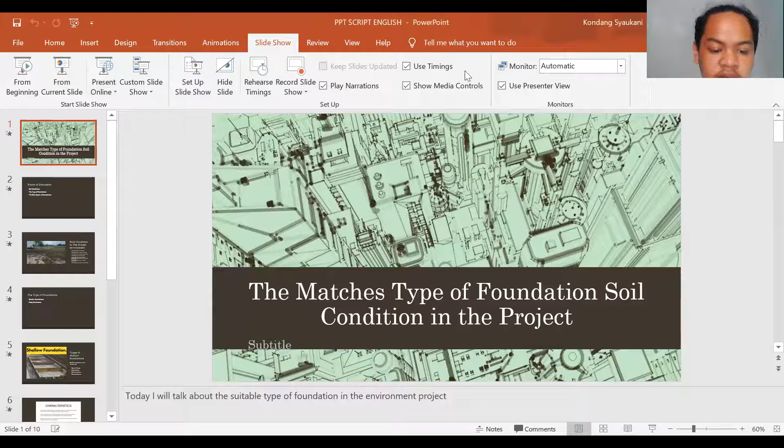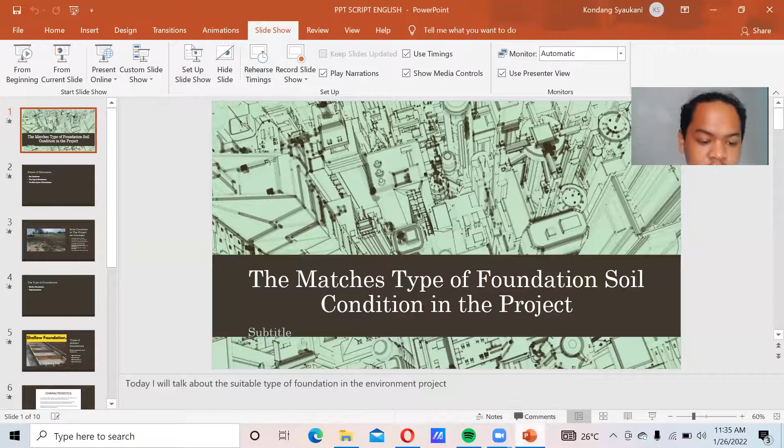Let's begin. What is soil survey? Soil survey is the process of classification of soil type and other soil properties in a given area, geocoding such information. It applies the principles of soil sciences and draws heavily from geomorphology theories of soil formation, physical geography, and analysis of vegetation and land use patterns.

That's all I have to say about soil survey. Let's move on to the soil survey report.

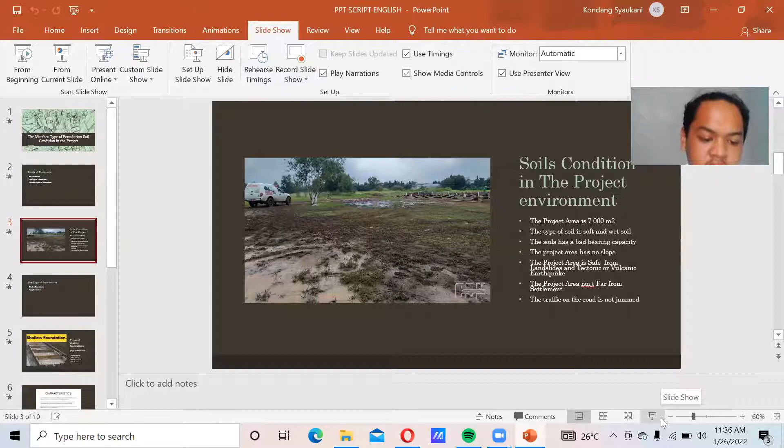As you can see on the screen, the project area is 7,000 square meters. This project area meets the requirement for the minimum area of a hospital building. The type of soil on the project and environment is wet and soft soil with a poor bearing capacity. Because the soil is soft and wet, there is a need for reinforcement of the foundation.

The project area also isn't far from the main road, so access to the hospital is easy, and the traffic around the project isn't jammed, which makes it easier to get the ambulance in and out.

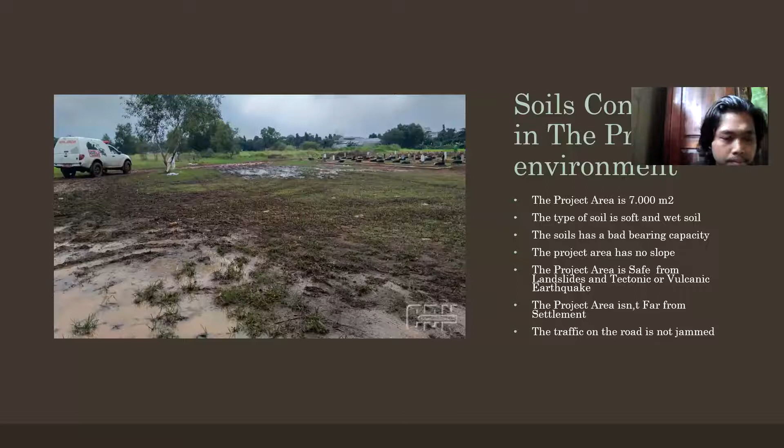But we have problems about the soil type. Can the hospital stand on the soft ground? Yes, of course. We have a problem with the soil type, but with the right foundation, the hospital can still be built and stand firm. Are there any other questions?

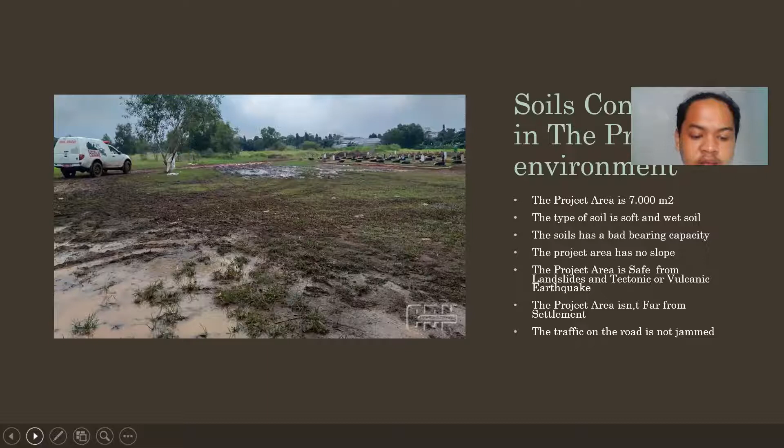Well, I have told you about the soil survey report. Let's move on to the foundation structure. The foundation structure will be explained by my assistant, Mr. Irfan. Over to you.

Good morning, everyone. My name is Irfan Aftalarik. I'm the assistant of Mr. Farhan. I will tell you about the foundation structure.

So, there are two types of foundation structure. The first is shallow foundation. Shallow foundation can be divided into spread footings, strip footings, slab foundation, and grid foundation.

Shallow foundation has characteristics such as the objective to distribute the structural concentrated load over a wide horizontal area at a little depth rather than a range of depth. This type of foundation is often selected when the soil has good bearing capacity, and the structural load will not cause excessive settlement of underlying soil layers.

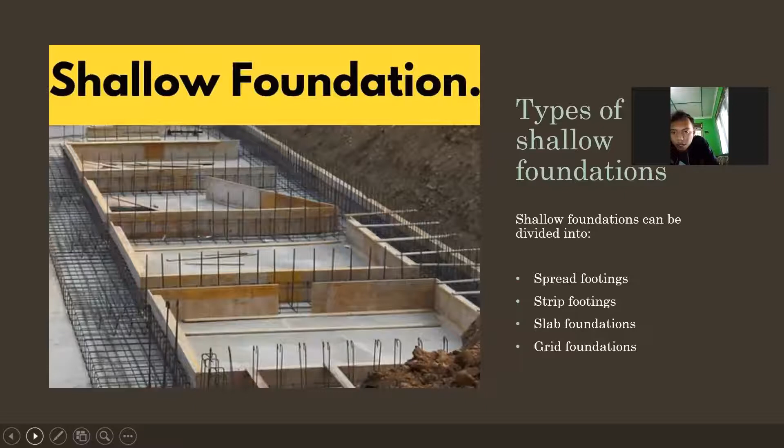Shallow foundations are more simple and cost-effective to construct than deep foundations because little soil is removed or disturbed. This foundation is usually utilized in residential and light commercial buildings. Shallow foundations are generally constructed using in-situ concrete, but some substructure elements can alternatively be constructed in precast concrete in part or whole to improve speed of construction on site.

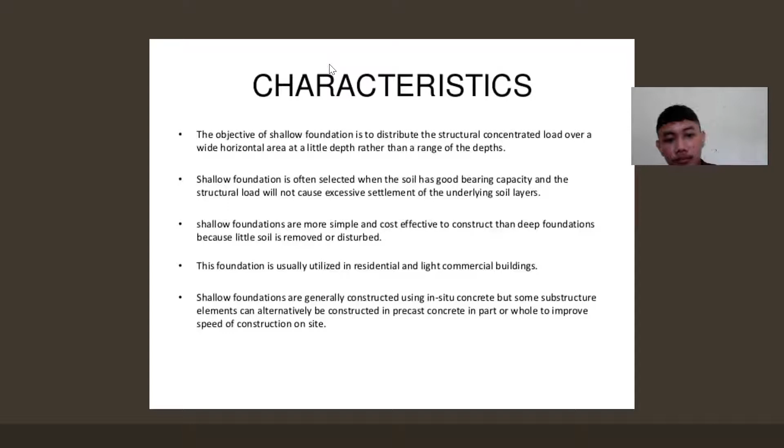Okay, any questions or input? I think that's a good type of foundation, but I don't think shallow foundation is suitable for our project because our project has a bad bearing capacity. Of course, boss, but I will explain the conclusion after I finish explaining the deep foundation. Okay, no problem.

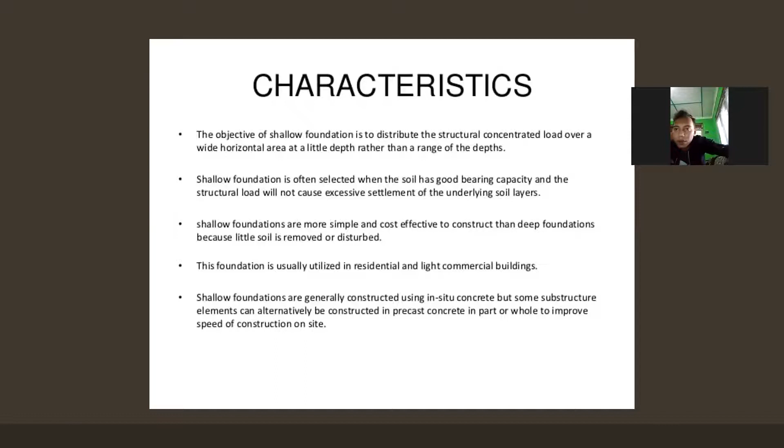All right, if there are no more questions or input, let's move to deep foundation, or pile foundation. The types of deep foundation in general use are as follows: basement, buoyancy raft, caissons, cylinders, shaft foundation, and pile foundation.

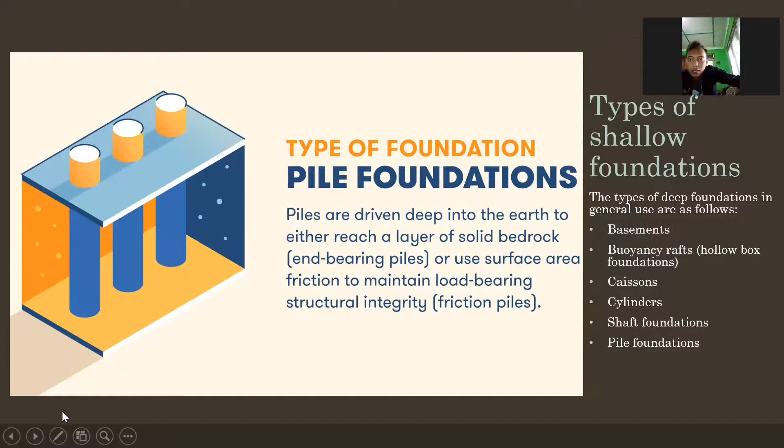Deep foundation has characteristics such as the objective to distribute structural lateral loads, and this type of foundation has good uplift force. This type of foundation is often selected for bad bearing capacity and skyscraper buildings, where the structural load would otherwise cause excessive settlement of underlying soil layers.

The construction of this foundation requires a complicated process, and the cost to construct the deep foundation is very expensive. All right, any questions?

Yes, Mr. Ginanjar, what is your question? As already said above, the deep foundation requires a complicated process of construction. So how do we set it up?

Next question by Mr. Ginanjar. The deep foundation requires a complicated process of construction, but we can still set it up with the help of expert, skillful staff and heavy equipment like a drop hammer or hydraulic hammer. This equipment will make the construction process easier.

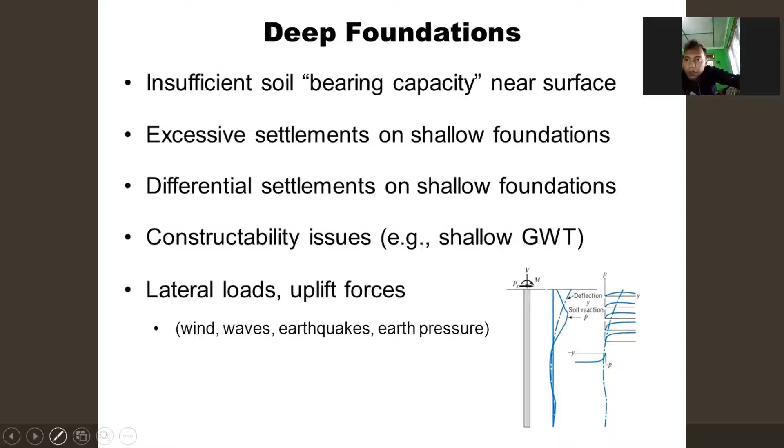Oh, I see. Thank you, Mr. Farhan. You're welcome. In conclusion, we will use Pile Foundation on this project because Pile Foundation is suitable to our project environment. Also, Pile Foundation can work with land and maintain very heavy loads such as in the construction of high-rise buildings.

The reason for using Pile Foundation is that it works brilliantly for weaker soil areas. It is suitable for deep installation and is long-lasting. Pile Foundation can be pre-ordered as well as custom-made according to need. It is desirable even for wetland construction and for all sizes of land construction. It facilitates reduced construction time. So the best option of foundation suitable for our project is Pile Foundation.

Yes, Mr. Iswan. I'm sorry, but the Pile Foundation has an expensive cost to the constructor. Does it matter to our project budget?

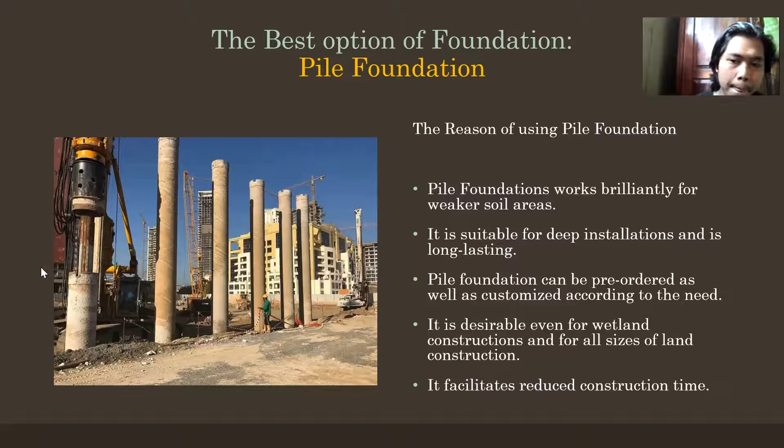Okay, Mr. Farhan, Mr. Kodang, thank you. I think there are no more questions. So we have looked at the foundation plan. Next, we will talk about the building structure. The building structure will be explained by Mr. Rafli.

All right, thank you Mr. Irfan. So I will explain about the building structure construction. Good morning everyone, my name is Muhammad Maulana Rafli. I am the assistant of Mr. Farhan. I am responsible for the structure of the building to start with. I will tell you about the details of the building structure. Please feel free to interrupt me if you have any questions.

Let's begin with the basic components of the building structure. They are beams, columns, roof, walls, serving the purpose of supporting structure, based on the soil survey report. For the beam and column, we will use reinforced concrete construction for the project.

Yes, Mr. Kodang, what is your question? Why don't we use steel as our building structure construction? Good question. We choose reinforced concrete for our project because it is easy to shape and flexible, and it's still usually used along with brick construction. Reinforced concrete construction is more well known as a building structure than steel construction.

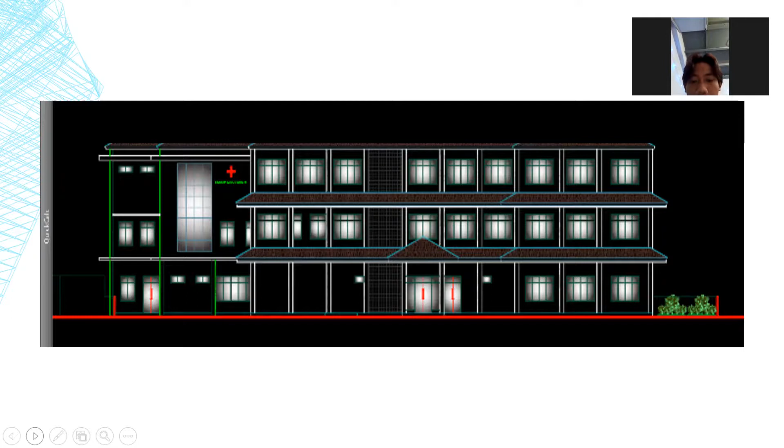The second floor will be used as ICU rooms, laboratory rooms, radiology rooms, and surgery rooms. The top floor will be used as service rooms like laundry, genset, and incinerator room. For the details of the design, it can be explained by my assistant, Mr. Iswan. Over to you.

Thank you, boss. Good morning, everyone. My name is Muhammad Iswan. I'm the assistant of Mr. Ginanjar. I'm going to tell you all about the details of the building design.

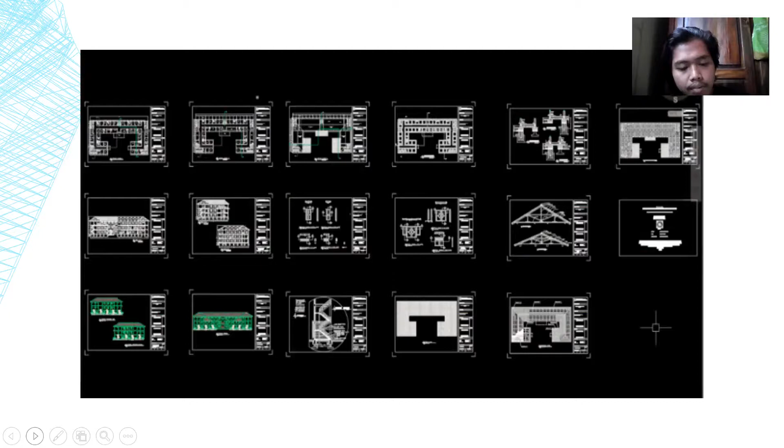Please interrupt me if you have a question. So this is the details of the design. The building design is environmentally friendly and sustainable. The building design doesn't require a lot of energy.

The building also offers a rainwater harvesting system and solar panels, helping to save our operational system, so we can use the area as much as possible. No area is wasted in the middle area. There is also a garden, which makes a fresh atmosphere, so visitors can stay comfortably without being bothered.

This is the 3D design of the hospital building. Do you have any questions or input?

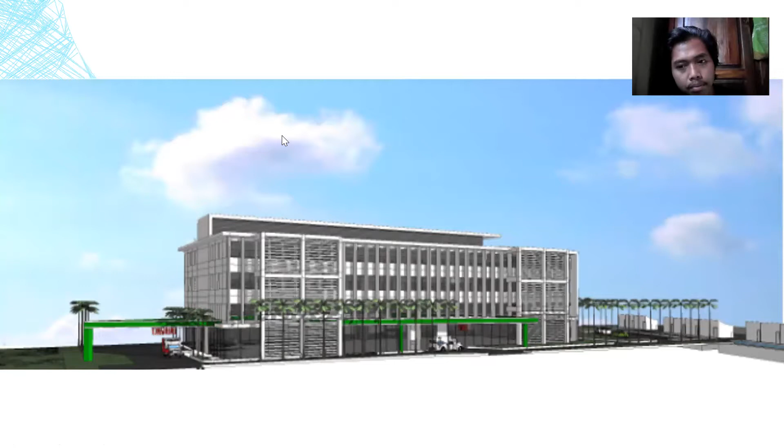This is a great design of the building. This design makes it easier to install the electrical system. I think so. I hope it will be good.

Okay, thank you, Mr. Ginanjar and Mr. Irfan. Is there any question else? Okay, I think there is not any question else again.